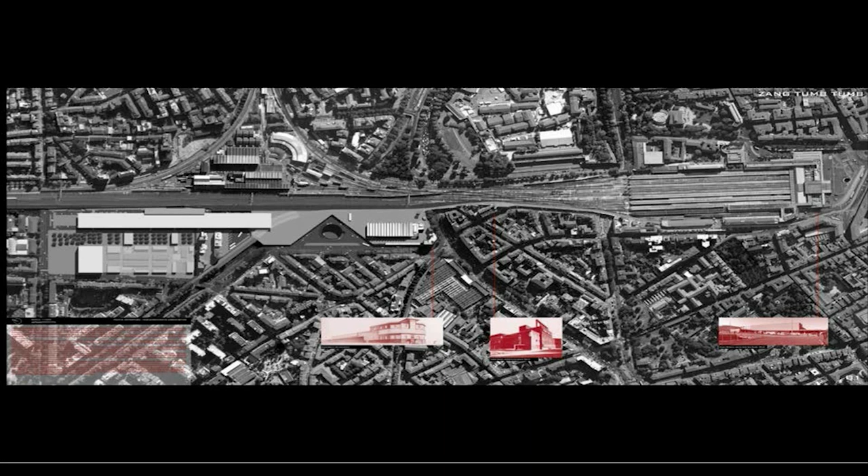Probably you know all about these famous Florence stations here, and this is a kind of competition to try for the new rapid railway systems. They like to have station connected to the existing stations itself. Actually, this time 500-meter long, about 150 wide, simple flat roof has to be supported, maybe 4, 5, 6 points. 4 points.

And that's a heavy structure. And I think all the communication systems are there for the city. And of course, we can build, we can support this platform just with columns and so on. But I try to ask the structural engineer Sasaki to find a good solution, or optimal solutions, of the most rational way, minimum support of these big frames supporting underneath.

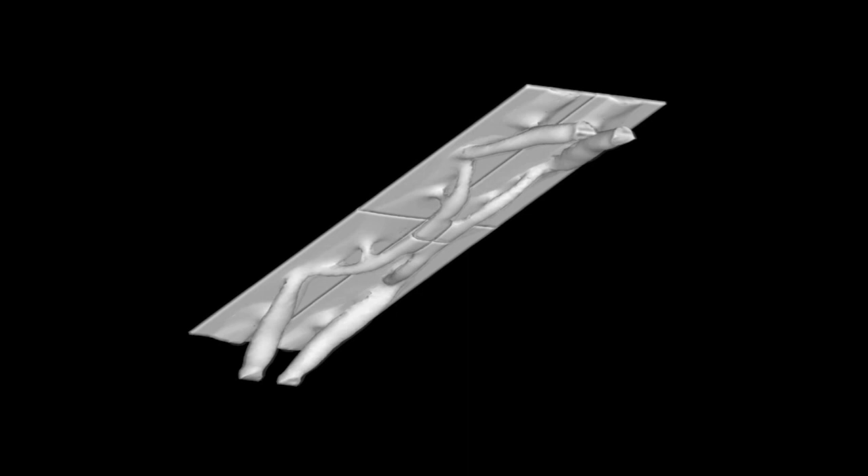This is more civil engineering side of the structure, and architecture is, I mean, the big architecture, quite large scale itself. This formula is based on so-called non-linear formula analysis, and it means the computer cannot calculate in the same time. One by one is a kind of, one small part is linear structure and analysis, and another linear part, connected each other.

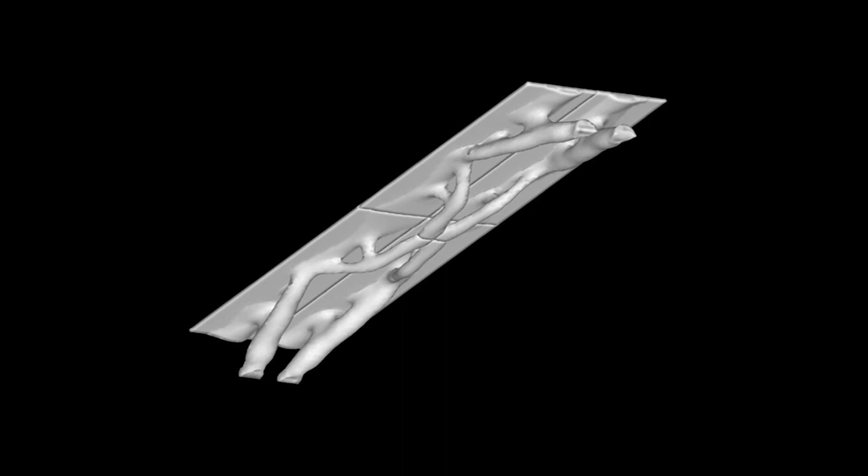Another way of transformations, and try to find the most optimized rational structural system, which I found we never thought about this kind. And one engineer, the collaboration I collaborated with, found this structure system. He surprised even himself.

So is it architecturally possible or not? I didn't know too. But in any way, if this is rational, it will be built. So I just...

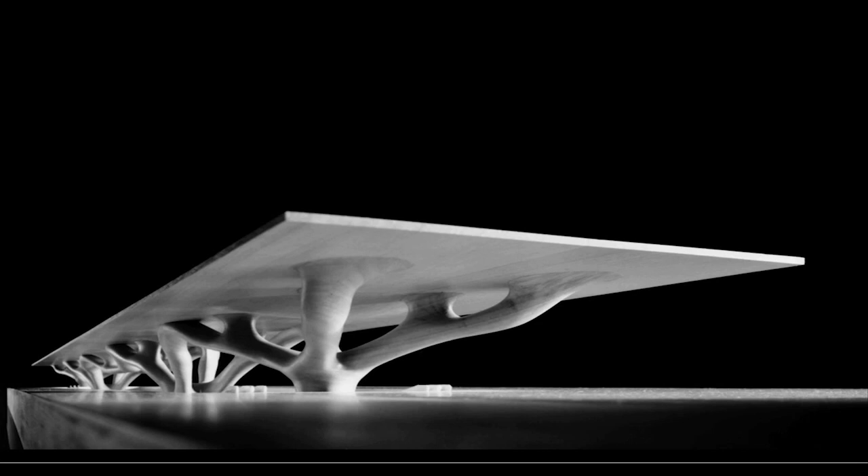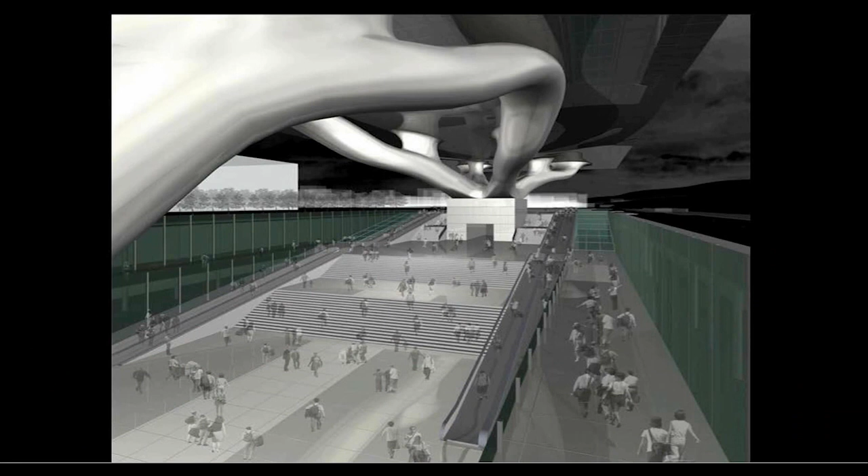Start to make with this model and transform into presence and into the program. So this only 4 columns, big columns, and very big platforms above the roof, and how to support it in the most rational way.

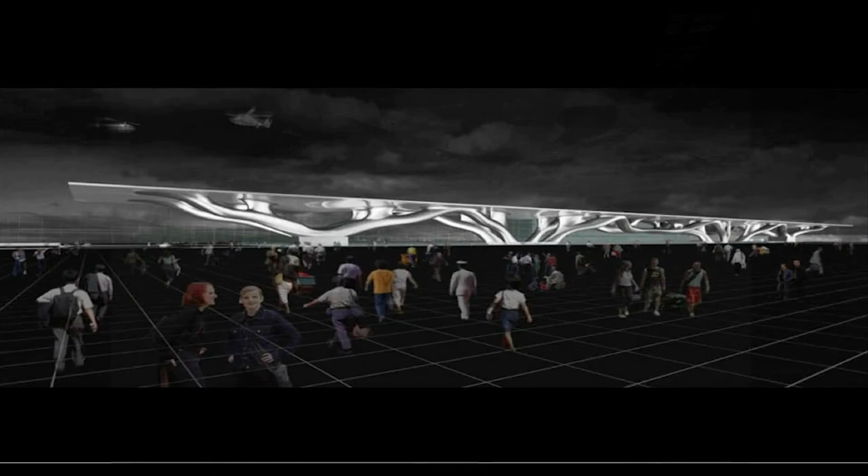And this was a proposal from 12 years ago. Of course, it was too strange, people thought, and we ourselves actually were not so sure at the moment how to build it technically. That is okay. This was not selected, or maybe next time we can find that.

This kind of structural system: if we look in history for an example of someone who tried to create or find interesting new forms, it was Antonio Gaudí. It's about 1906, 1908 or so, just the beginning of the 20th century. He was an excellent architect by hand, but he also had very rational structural studies. And I love this kind of approach.

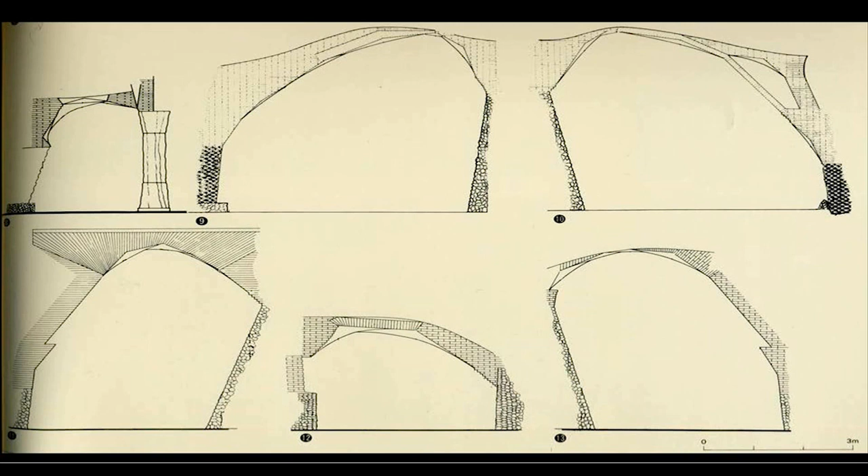And part of that, in the crypt of the Colònia Güell Church, he realized. Also using normal traditional masonry systems, he tried to design this kind of structure. So I found this example one of the 20th century's most important, interesting approaches, this time using masonry structures, a traditional technique, but at the same time finding, even in a limited situation, interesting space. That is the way he developed.

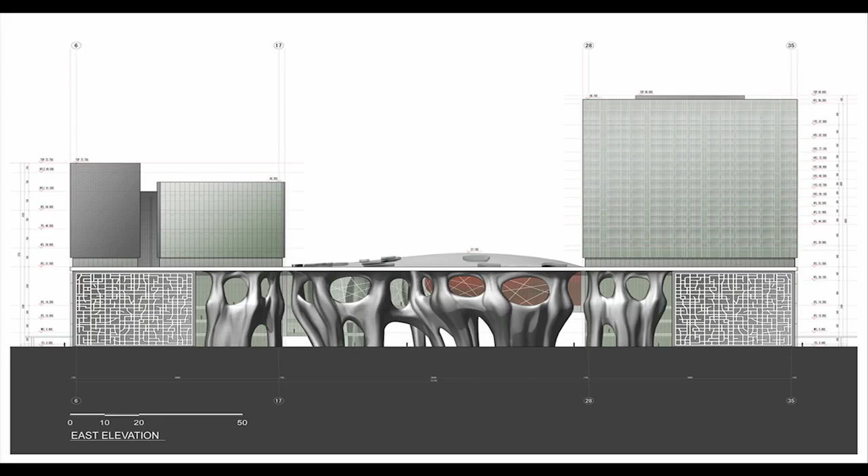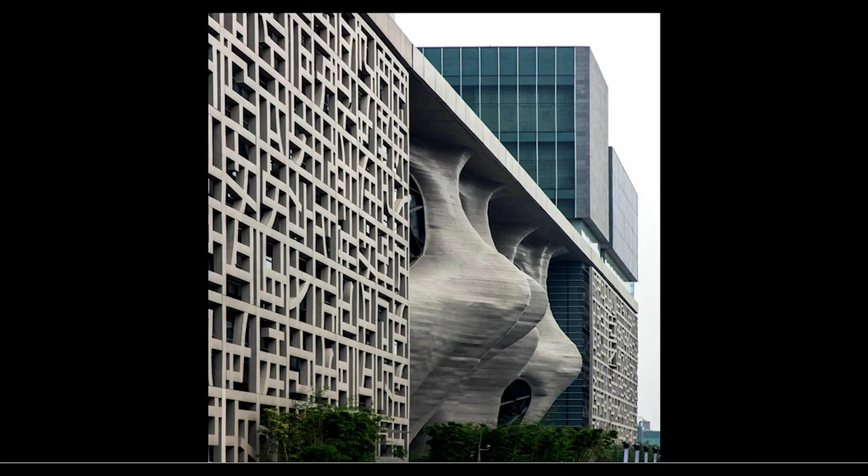So almost 100 years after, 80 years after, I had one chance working in Shanghai on an office tower, design center and office complex, hotels and shopping malls and so on. Also in the middle, cultural centers, the so-called Himalaya. In the middle of the building, we learned from Antonio Gaudí's very interesting approach to form, using that upside-down technique and at the same time optimization of the forms. But the major problem we faced was how to cast these very big structures.

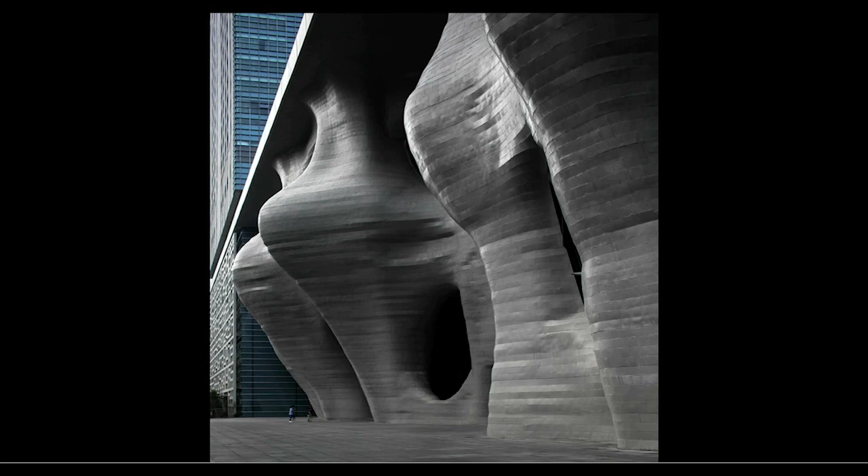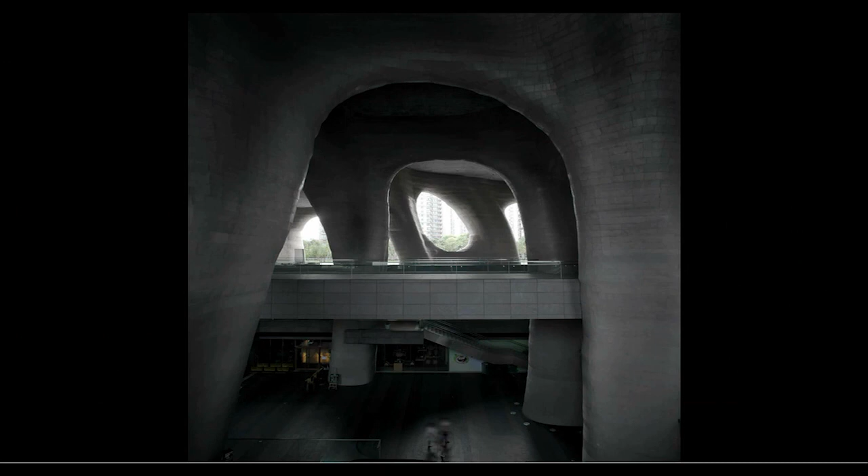And this time, why not use concrete; this is not the skin itself. The structure itself becomes the most rational form. And you can see on the human scale, this is quite a large open space for cultural events almost every day. Underneath is shopping, and above are museums and hotels, connected. So this is a strange cultural complex.

So my first idea is, in the city, museums always try to distinguish themselves as independent, not including commercial, hotel activity, offices and so on. But today, I think, if you come into a hotel, behind there is a museum. If you come into the museum, behind there are hotels and so on. This kind of commercial and cultural mixture and complex makes all the activity more active.

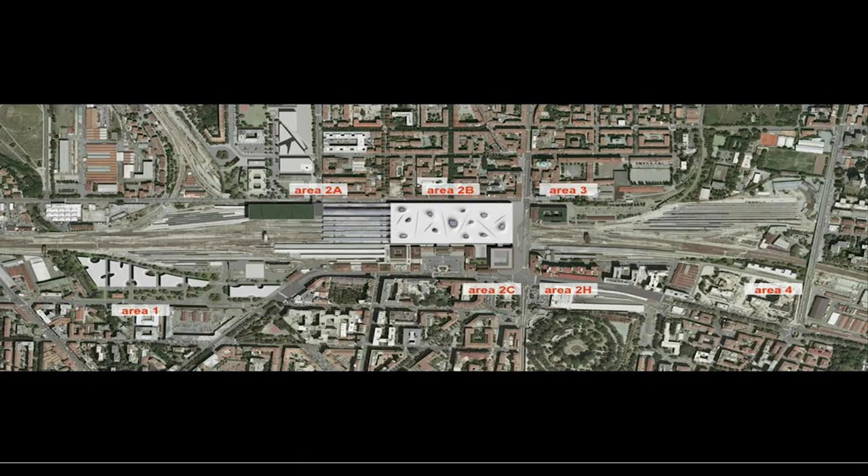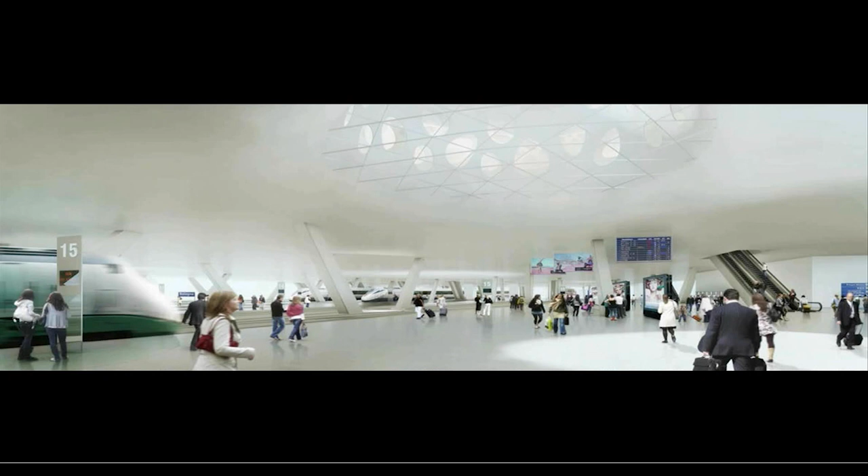We thought of supporting this kind of big box above the lanes of the station, as part of the station, including commercial and cultural activities above the station lanes. Such a big box needs skylights, support and structure, an enveloped station. The whole roof is one continuous concrete slab, cut and curved like Fontana's work. It automatically creates a kind of beam partially. And if we make a hole, a kind of tube, it becomes the support for the beams, like the Shanghai structure.

If you look at the very low level, what you call rapid trains, and on the surface, traditional types of lanes or trains, and over that, this kind of new structure.

So still, I think, they study 20th century's important artists or architects. They made sketches that they left. We have lots of things to learn from them.

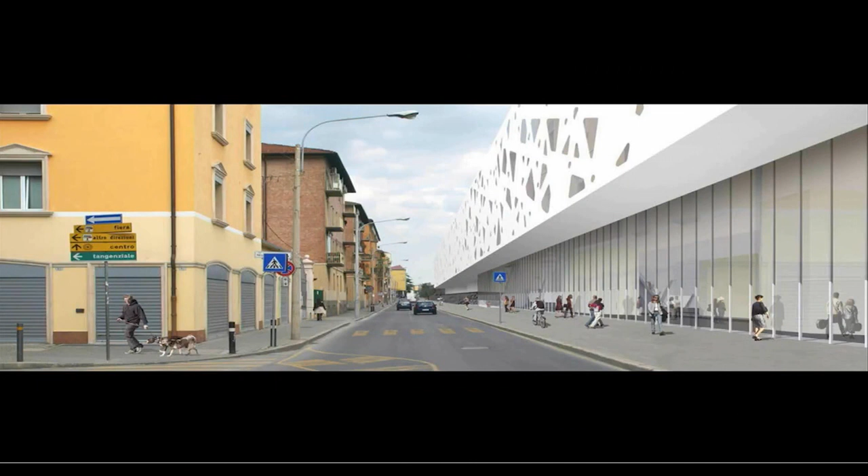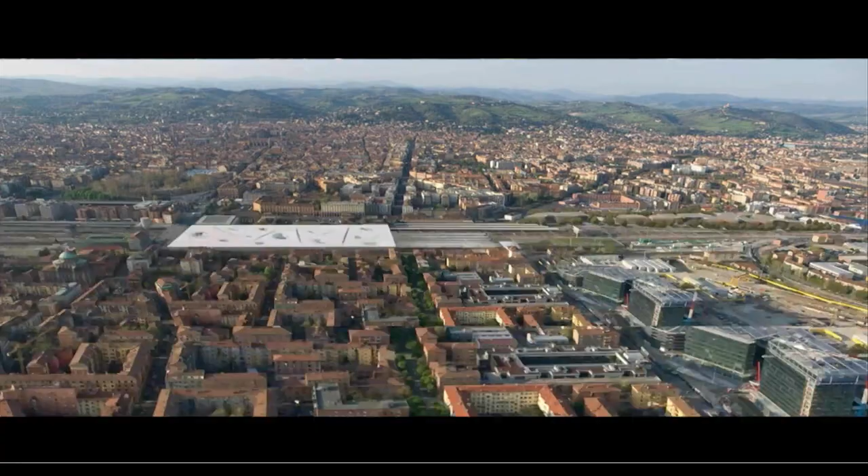So this is a connection of the scene of the existing townscape, and finally, I hope this station may be realized. I don't know when. You don't know.

And in the middle of those two projects, I had a chance to make some proposal for the city of Doha in Qatar. And this is the whole campus master plan, and there is on the right side a kind of ceremonial court, and on the other side, a big national convention center, and all other big buildings are campus buildings.

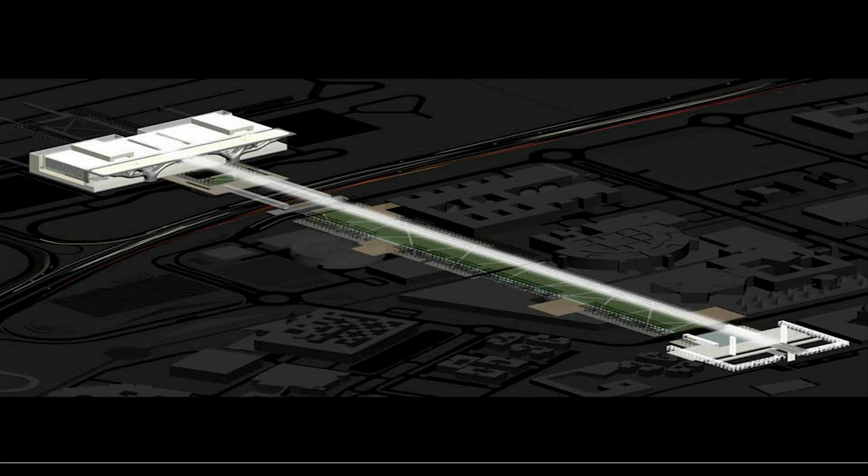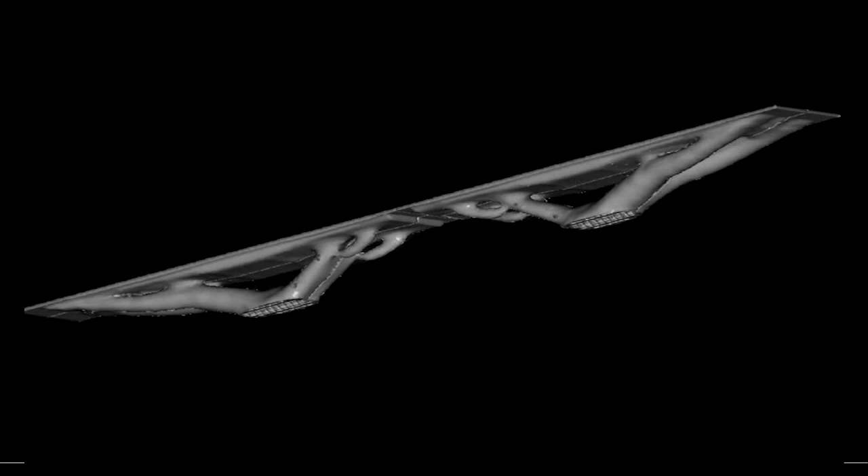And to create this convention center, same way, again for support, and actually a 250 long flat roof, and computer, and we asked the computer to find. No, we are not designing at all. Asking the computer just to find a reasonable, rational point.

And strange enough, those forms, computer-generated forms, come to resemble the natural form of the trees, mango trees and so on. Also, at the same time, a kind of more organic structure, like our bodies. Which is strange enough, the image of the right angle, straight line, flat things becoming more and more organic, bio type of images.

They come out. And this is a kind of calculation of the convention, auditoriums behind, and this is just in front, and those are the visual connections by light. And actually it is realized.

And behind is the simple normal type of glass box, which functionally has no problems, including a 2,500 seat auditorium and 700 seat concert hall and 5,000 seating convention space, exhibition spaces, and those are just the programs. Those programs are behind, and in front, we try to signify a kind of new image from the freeway, to give impressions.

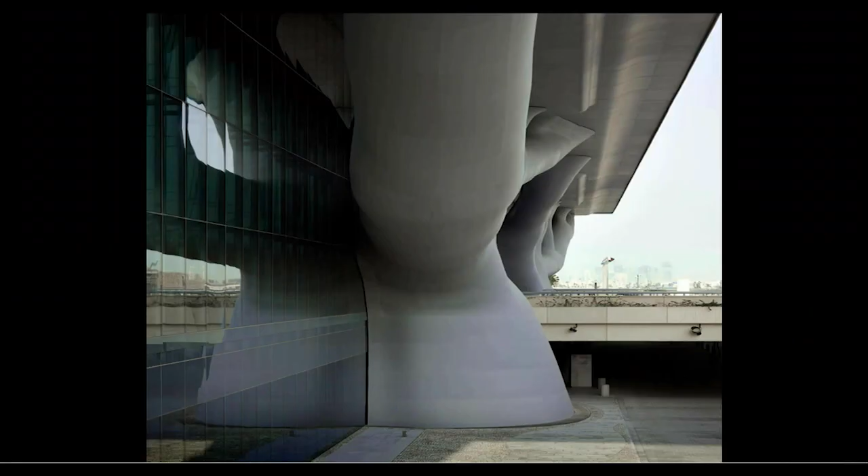And in the Shanghai case, we used reinforced concrete, very complicated concrete forms we had to use. And this time, the major structure is just like a human hand and bones inside. And this is a kind of secondary skin, which is steel, welded to each other and polished. So actually no seam is visible.

But after the production, at far distance, in Malaysia we produced and shipped to Qatar, and created this structure. This is a kind of continuous lobby of the convention center. And of course, this is Louise Bourgeois' famous spider structure. It's very big. So if you look at this, you can imagine the structure itself.

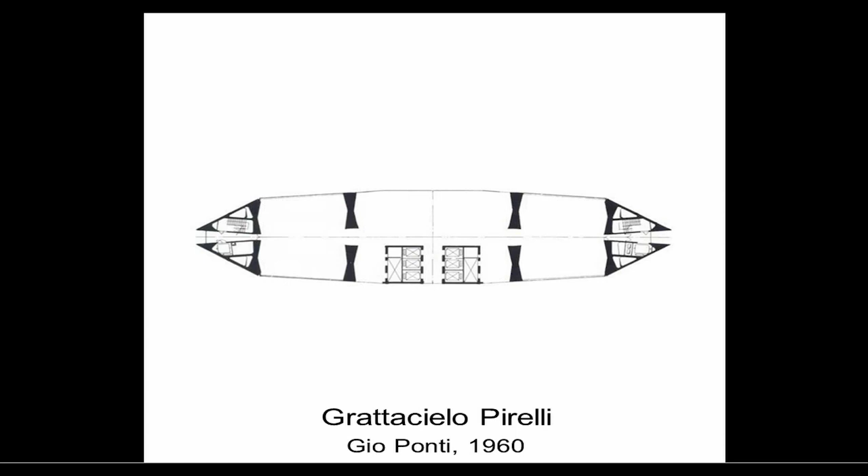I think even though this is old, 1960s, this Pirelli building is the most interesting at that time. Still, I think, important. For example, one is the structural system, the other one is a kind of total form compared to other towers. No straight simple form, many different angles on the surface, characteristic of Gio Ponti.

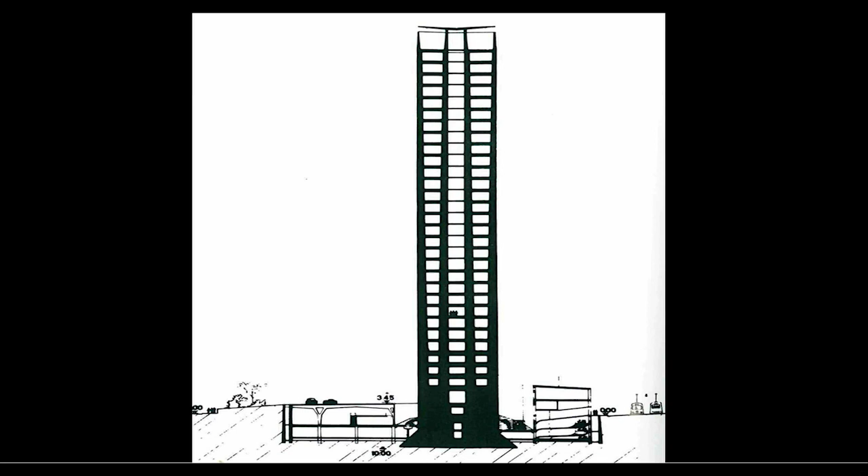And the interesting point is this structural section. You see this whole structure looks like trees, from the ground, and gravity or the weight from above comes, lighter on the higher part, heavier underneath, and all the weight goes into the earth.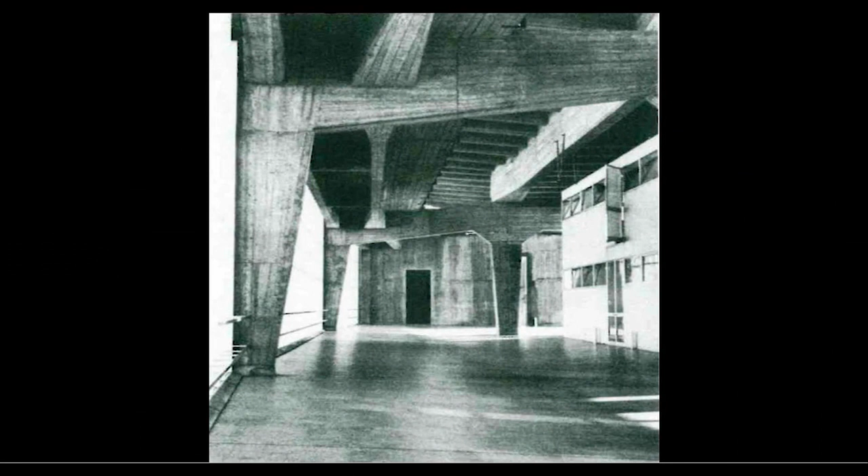And the structure is, of course, reinforced concrete, and those are like Antonio Gaudí's studies with brick, Catalan walls and bricks. This is concrete, and concrete can be used not as simple posts and beams, but as a more organic structure. And Gio Ponti's famous tower is still there. I think this is a monument, historically a very important structure.

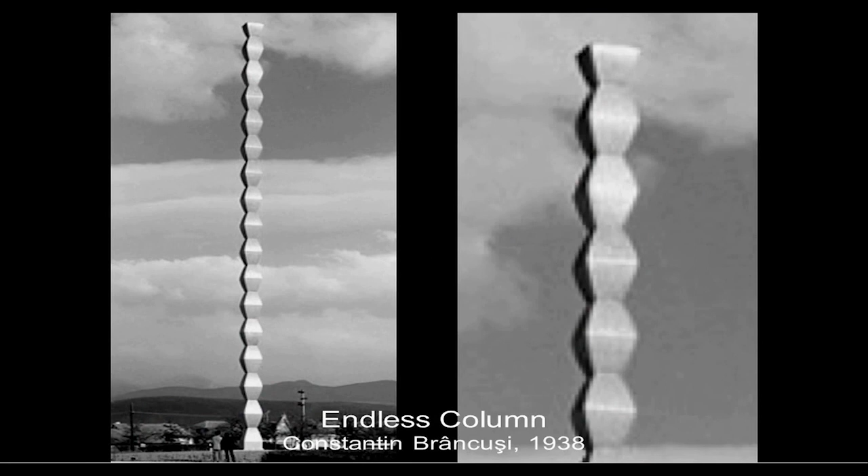That's what's made in steel. And my interest is, another way, Brancusi. Constantin Brancusi, of course, did sculpture. He did many interesting bronze, brass structures and sculptures and wrought works.

But one of the important things he did, he always treated the base under his objects as another important element of the sculpture. Now, in most cases in museums, there's a simple box or plate, and the sculpture is on top. But Brancusi designed both, and actually one of the bases is this.

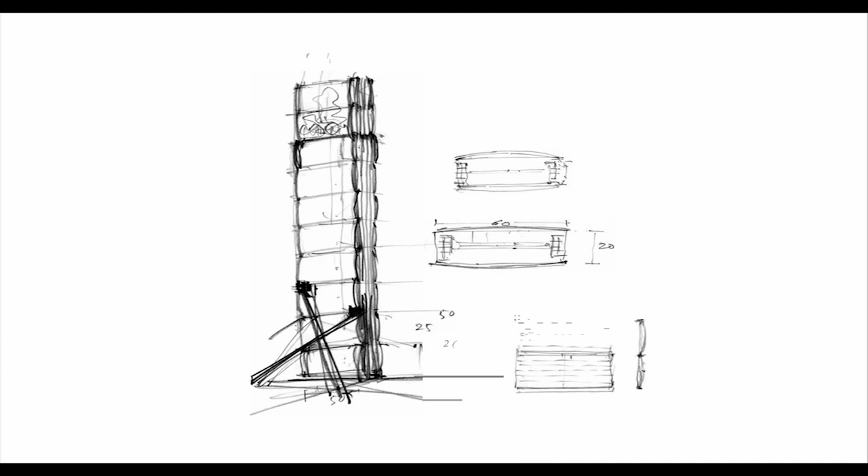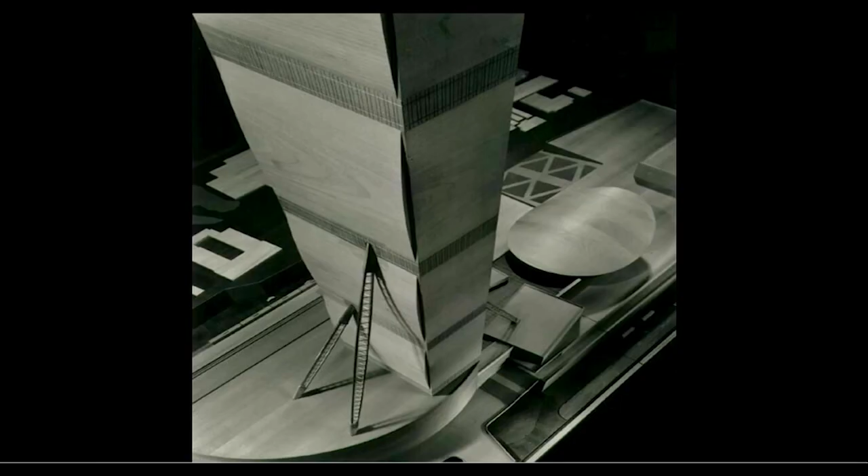And in that kind of way, I once studied, though it wasn't realized, in Tokyo, above one of the stations, some high-rise tower structures based on Brancusi's endless column. This was maybe the end of the 80s. Just a proposal I studied, with rapid train stations underneath, and some imaginary studies we did.

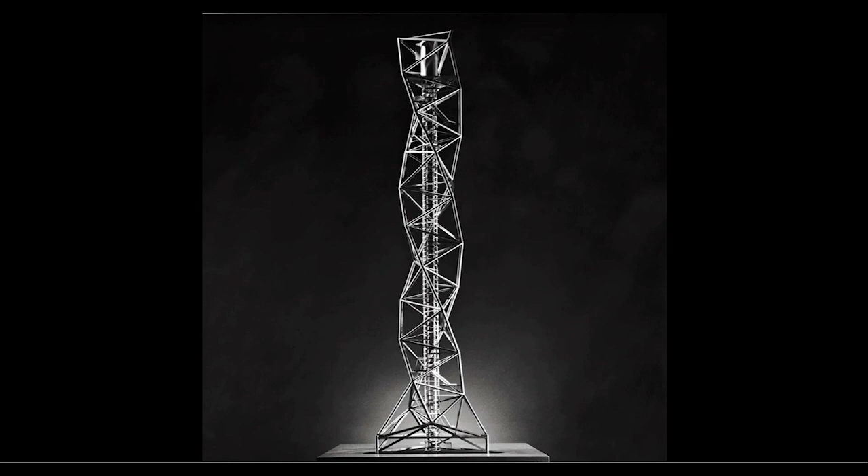And at a similar time, I studied the tetra, stacking one by one to create a tower, which in its stacking manner is similar to Brancusi. But Brancusi's case is a vertical simple element. But in this case, of course, it's a simple tetra unit.

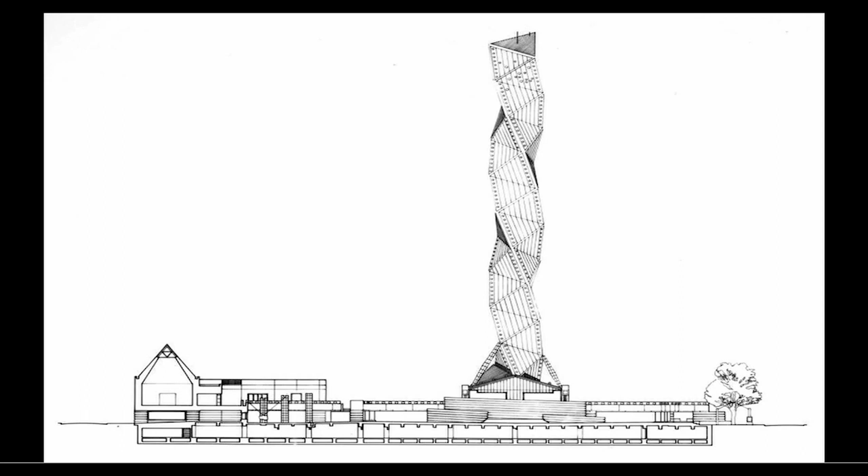And the tetra we covered with titanium at this moment, and the total height is just 100 meters this time. 100 meters is a kind of anniversary of the city. So this tower is a kind of monument for the city, and at the same time a kind of symbolic image connected to the whole city's activities.

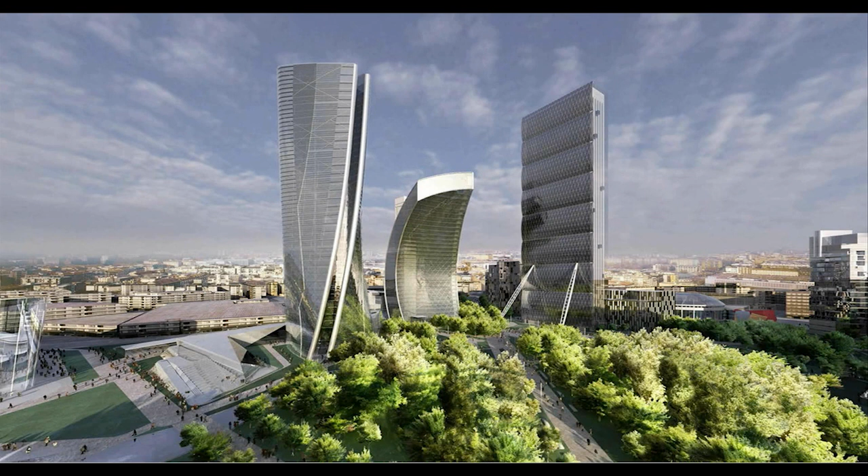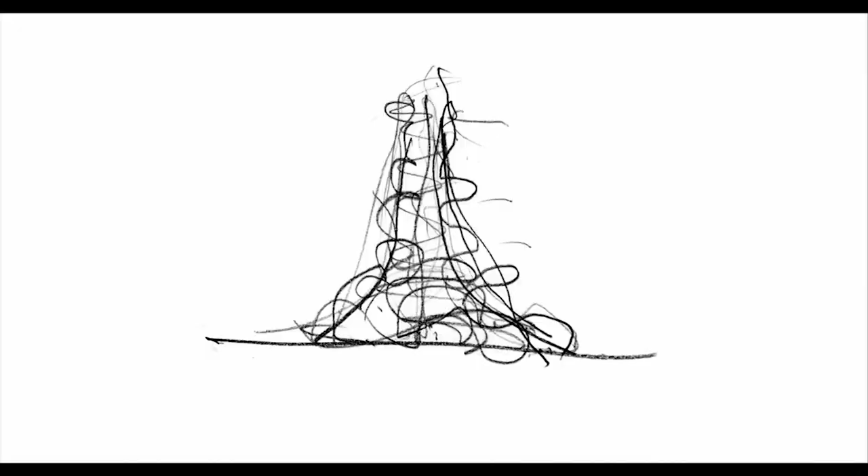So these are those studies, I think maybe already 25 years ago we were studying. And for the Milano redevelopment of the Fiera area, Daniel Libeskind, Zaha Hadid, and myself were each asked to design a tower. And this time, I tried to basically go back to the basic structure, the basic character of towers in structure.

And for example, this kind of form is easy. We find it in the Eiffel Tower in Paris or many other places. Those are the most reasonable forms for bearing the horizontal wind, against the wind side. So this creates that way.

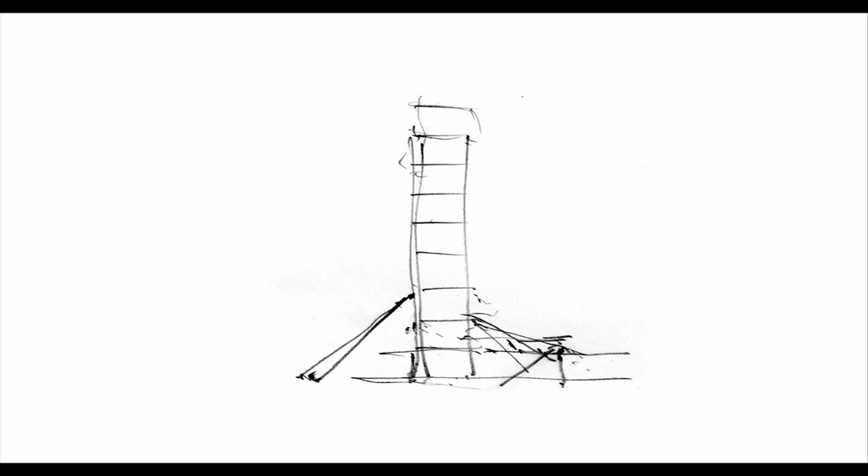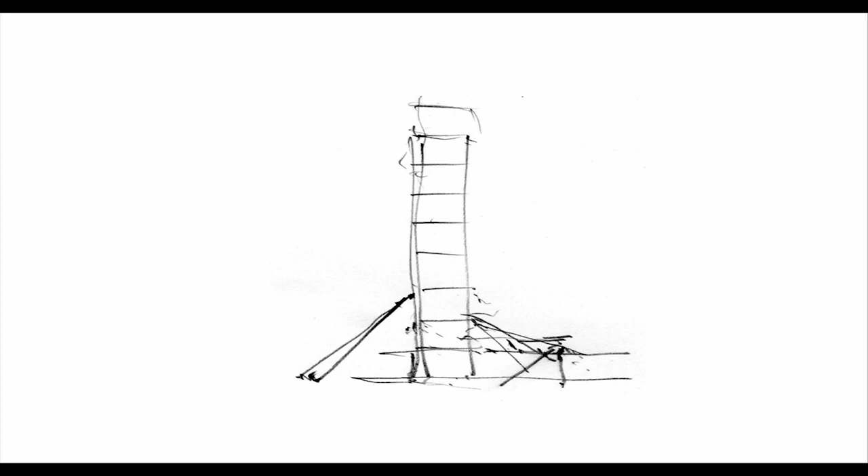And another idea I thought of: if we seriously work on the most efficient office building, using contemporary elevators in the most efficient ways, the major form must be something vertical, and at the same time it must take horizontal wind, or, if this is in Japan, more the horizontal waves of earthquakes.

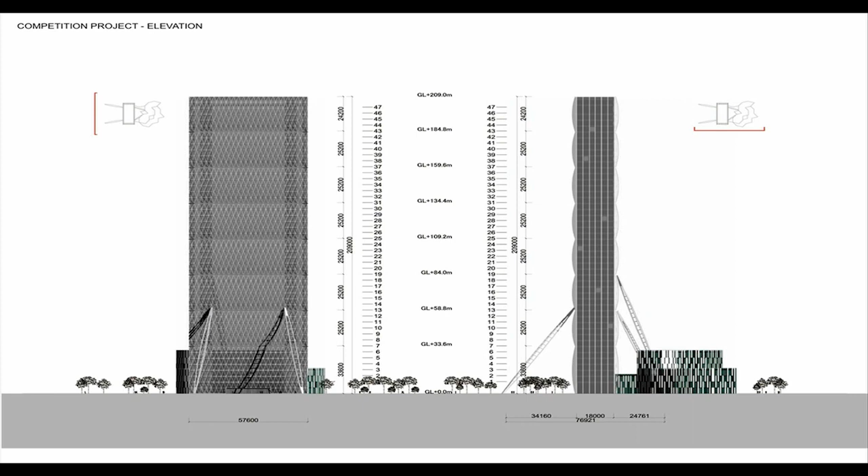And for the CityLife project, we came up with using this stacking unit outside as an image, and at the same time this brace against the strong horizontal wind, and we studied wind tunnels and how each area twists and so on. So those are the studies this time. And finally, we came up with very simple solutions.

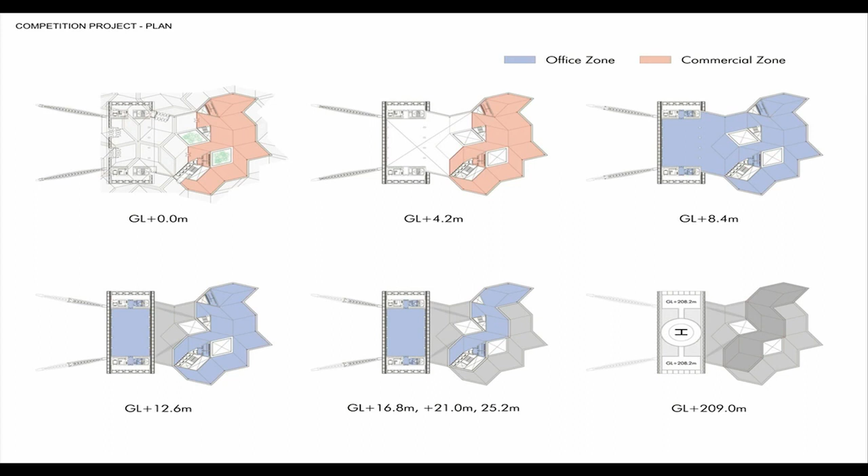Elevators at both ends, possibly visible, looking at the city, and at the same time two cores, structurally, and those cores and big horizontal frames are making a kind of box type, and this is the usable space inside the building. Elevators on both sides.

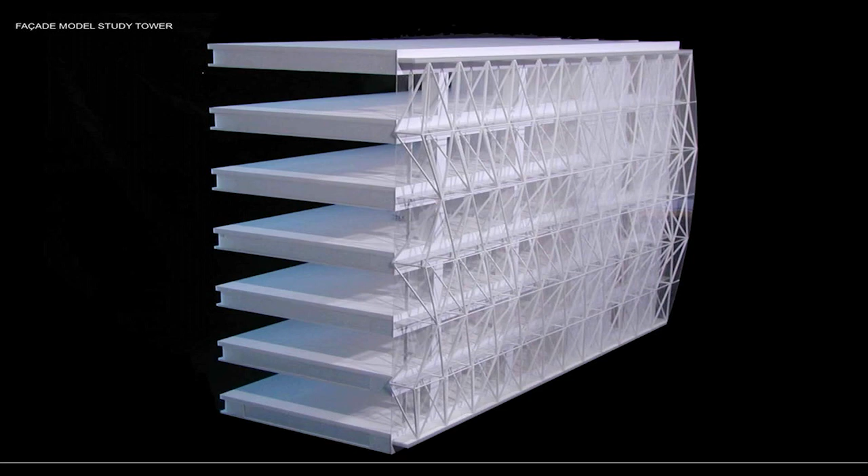And also the stepped buttress on both sides, and like the Eiffel Tower's situation, we tried to create a new way of integrating skin and structure into the most efficient office space.

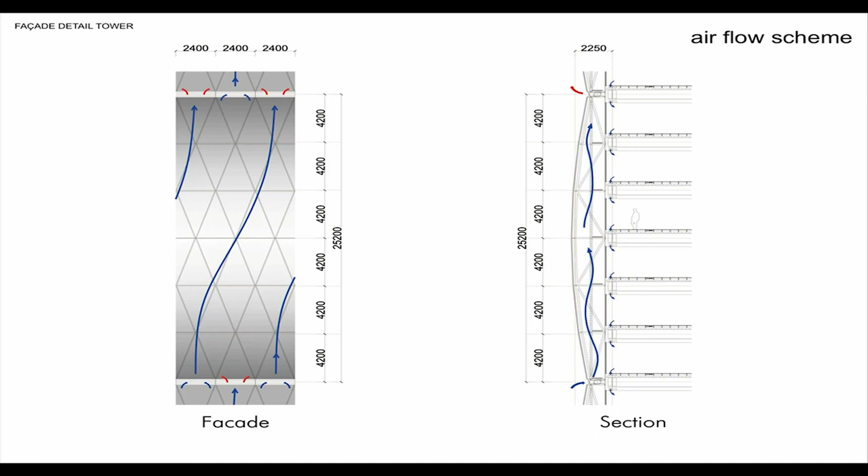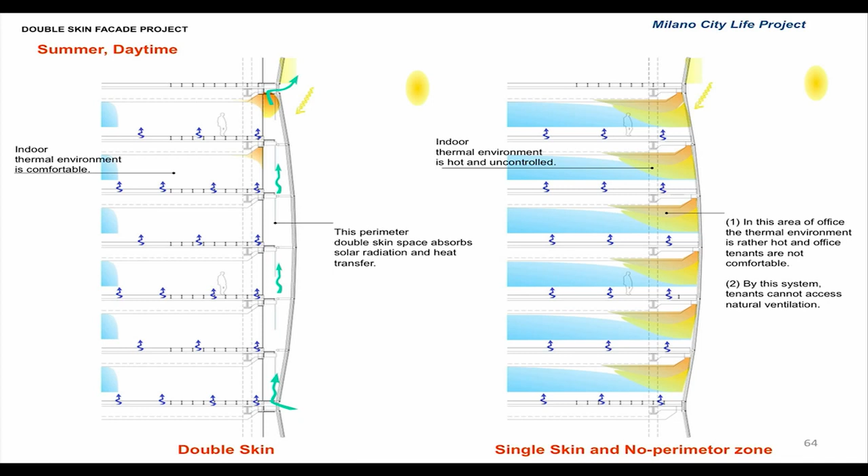And climatic control: because this is completely glass, in the space in between this curved surface we tried to calculate wind control, heat control, this kind of studies. And the distribution of exterior energies into the building itself.

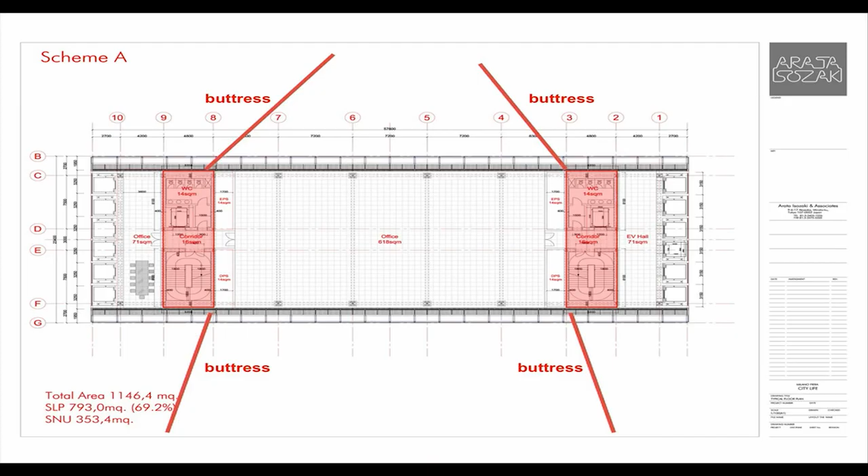And this is a very simple structural image. Of course, a very early stage, but you can find two kinds of spines on both sides, and those have a stepped buttress. And we studied wind tunnel type analysis. And finally, we arrived at this solution, much more efficient.

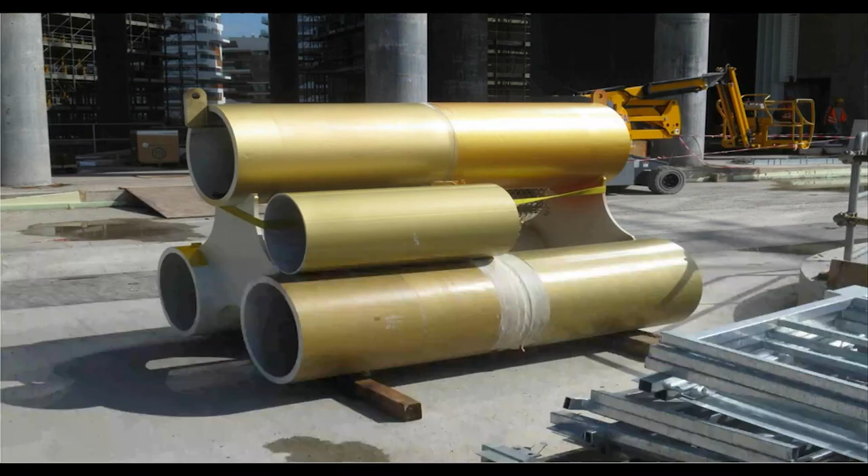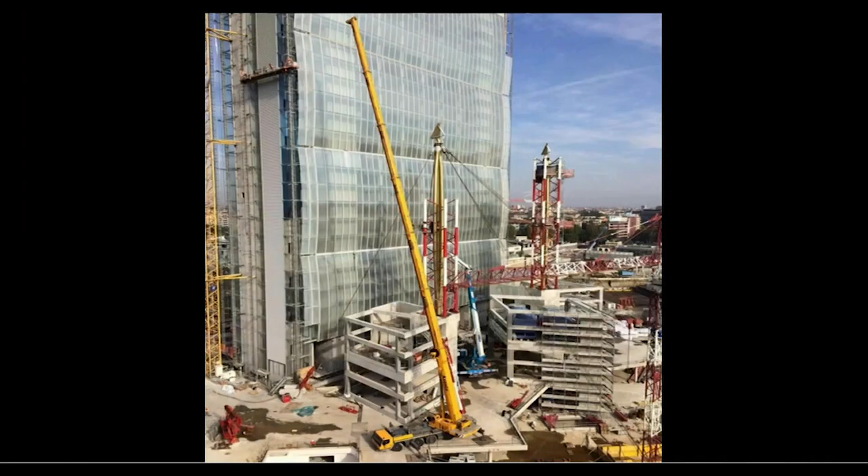And to hold the four buttresses on both sides, on one side it is already done; the major twisting situation will be connected to the much wider base by this step.

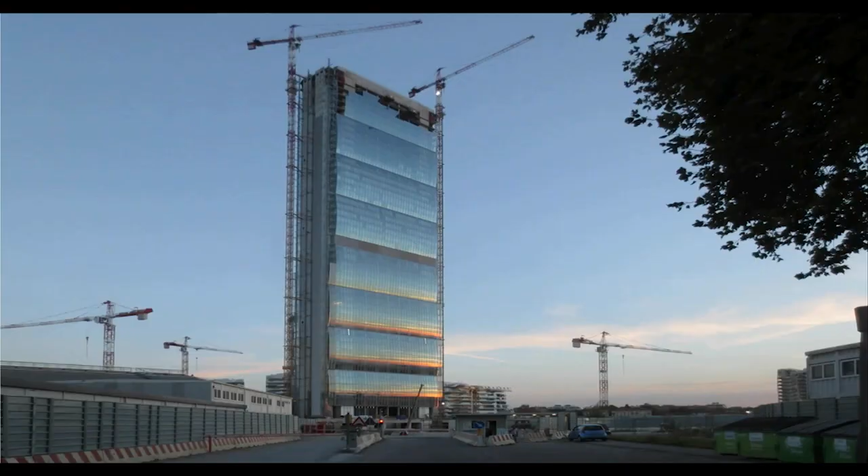And day by day, construction is going up. This is almost this moment. The photos are a little bit developed, huh? Almost finished. Yeah. Okay, so here you can see the reality. Those are the towers which I studied and are now going to be realized.

And even though it is a very simple single structure, at such a scale, technically, we studied lots of different sides: wind studies, vibration studies, and facade studies. But these are the necessary studies to integrate, to make this kind of tower function perfectly.